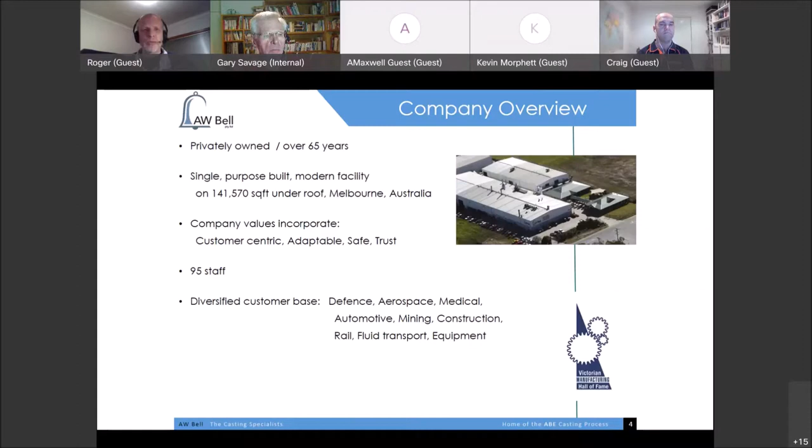So the business units for AW Bell - this is one of the things that's not as well known about the company. We often talk about our foundry activities, but AW Bell actually has 3 business units: the foundry, or main business foundry unit, AW Bell Precision, which is a precision machining facility and a separate business unit, and then AW Bell Equipment.

Now, I've told you a bit about the foundry. The precision machining is part of the company - we have 10 machining centers, which are all operating pretty much 24 hours a day, and a range of 4 and 5 axis machines. We have 3 new Okumas in that department, and it's going absolutely great guns, helping us keep up with a lot of the aerospace products we're doing.

We also have assembly, and tier 1 assembly and that sort of thing is also done through our precision machining division. Now, we also have AW Bell machinery, which is equipment design and build.

AW Bell machinery builds equipment for customers all over the world. During last year, they actually built a robotic grinding system for a foundry over in Adelaide, which was fantastic to see - it was half a dozen robots or so on the floor for quite some time, and seeing it all evolve was absolutely awesome.

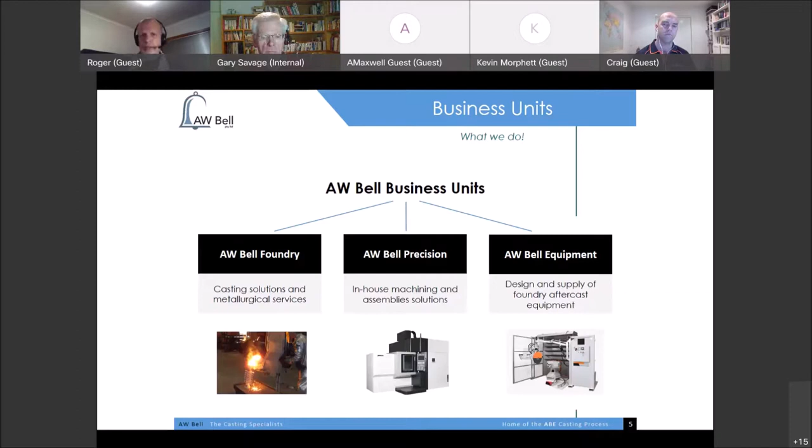But the majority of what they make is more so cut-off grinding and water blast systems, mostly for the investment casting industry. Their main customer base is in North America, where they're known as one of the top equipment suppliers in the North American foundry industry.

So some of our customers - this gives you some idea as to why we had to go down the path of upskilling and looking at what we can do to help our staff out. As our customers demand higher and higher levels out of the products, we need to be able to account for that. Certainly, Northrop Grumman is by and large our largest customer, across a range of products mostly in the EO-DAS area, but also in some other aerospace fields.

Marand Precision, which manufactures the trailer for the Joint Strike Fighter, is not far from us - a local Victorian company. BAE Systems, who we work with all over the world. Rheinmetall Defence, who we became an approved supplier for back in 2016, and now that they've moved on to get the Boxer and into Land 400, it's been a really nice outcome, and it was very good to be part of their supply chain in advance.

Australian Submarine Corporation - we supply engine components for the diesel engines that go into the Collins-class submarines. Thales, Glencore, Kenworth, Leica, Bombardier, and Levett. And Levett, of course, is where we're part of Pratt & Whitney's supply chain, where we supply engine components into the F135 engine.

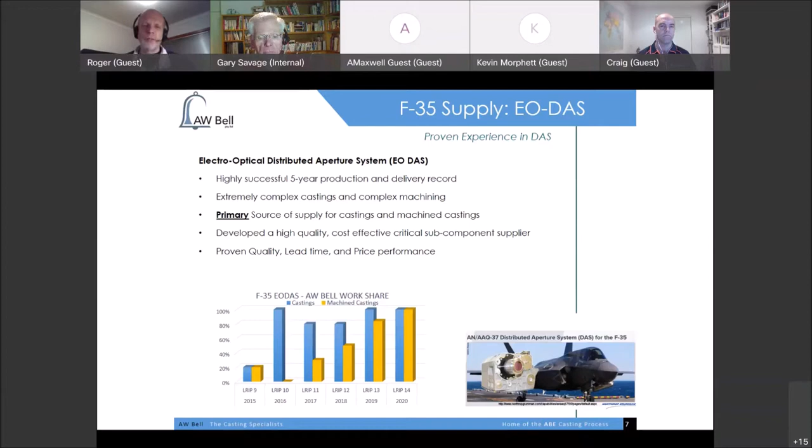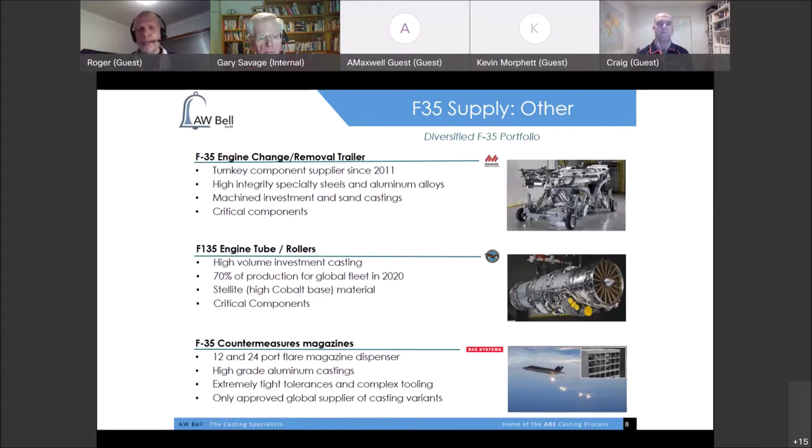Some of the other ones I mentioned - the engine change trailer has some quite significant castings, especially associated with the hubs in the corners. The parts we make for Levett, which go into the F135 engine, and then there's the flare magazines, or electronic warfare magazines, made by BAE, for which we are the only approved casting supplier of those parts globally. We're not currently in production on them, but we are the only approved casting supplier of the parts.

Other key customers include submarines, automotive.

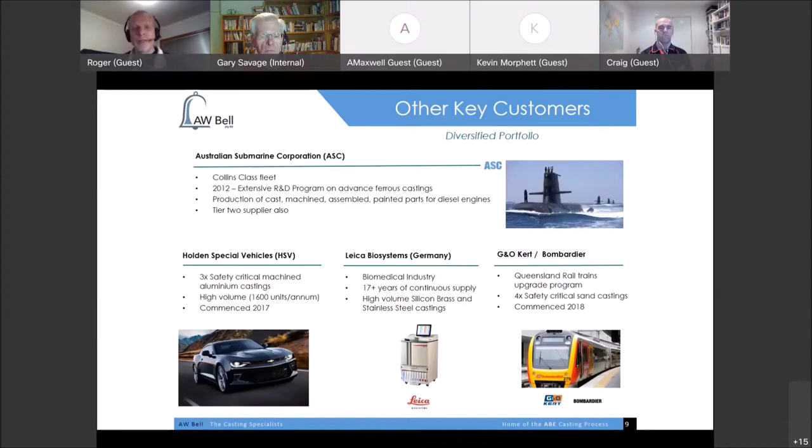We did a lot of work with Holden Special Vehicles up until recently, especially on the Camaro that you see here. Then Leica Biosystems in Germany have been a large customer for many years, and Bombardier. And we've been actually supplying quite a lot of product that has been going into Queensland Rail recently as well, which has been a really nice piece of work.

So the course in precision metal castings that was developed, it was identified that there existed a need to upskill the current staff and also to provide a fundamentally improved recruitment career pathway for workers in precision investment castings. Long term, it is AW Bell's wish to move into higher valuated casting markets requiring an improved or higher skill set.

Through the Victorian Skills Commissioner's Office, we applied for and started looking into the Workforce Training Innovation Fund projects that were being put out. I heard a little bit more about it because I sit on the Victorian Skills Commissioner's Industry Advisory Group, so I knew a little bit more about what was going on with it.

What we did is we applied for one of these as a partnership between AW Bell, Chisholm TAFE, and Meridian Sculpture. Meridian are an art foundry who also do investment castings, and they're over in Fitzroy in the city in Melbourne. The total project value for its whole run through was approximately around about 1.1 million, including cash and in-kind contributions from all of the partners.

We first had to submit a seed funding proposal, which was pretty small, around 50,000, submitted in March 2017. That was basically to give an outline to the Department of Ed and Training to say, this is what we think we're going to be able to do. What do you reckon? Then they could assess that and say yes, go through to a full proposal, or no, pull the plug then.

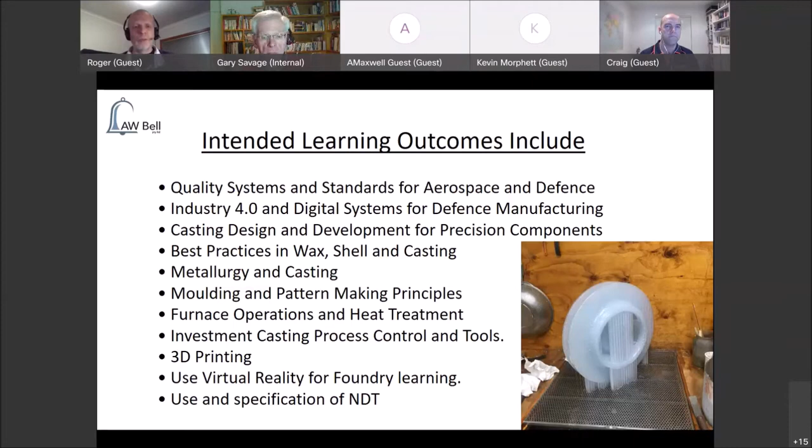The picture you see there is a 3D printed SLA impeller, which is then turned into investment casting. It incorporates a whole lot of the things when it's finally cast and made into a part, then put into a pump. It incorporates a lot of what you see on the left-hand side, except perhaps virtual reality for foundry learning, which is still a work in progress—we're all still learning exactly how you can use virtual reality for foundry.

The group is very multidisciplinary, and we chose it like this on purpose. We have a range of supervisors and floor staff chosen from all areas of the business, giving us the ability to generate multidisciplinary teams bringing different skills and experience. There's a very strong emphasis on peer learning, so you need a good mixture of people for that within the group, which is very important. I believe it's the best way to do it, and the staff absolutely love being taught how to do stuff by people they actually work with.

The course at a glance runs for approximately 2 years, so it's not lightweight—it's got a lot in it. There's a total of around 400 hours, about 300 face-to-face and around 100 self-paced. The self-paced learning is also partly workplace learning, because that can mean putting someone into a new area where they learn on the go, with the supervisor given a framework about what skills they want them to learn. Then when you go to assess them, you can do an observation and just answer the question: can they do all the things I wanted them to be able to do? So there's a very strong emphasis on workplace learning.

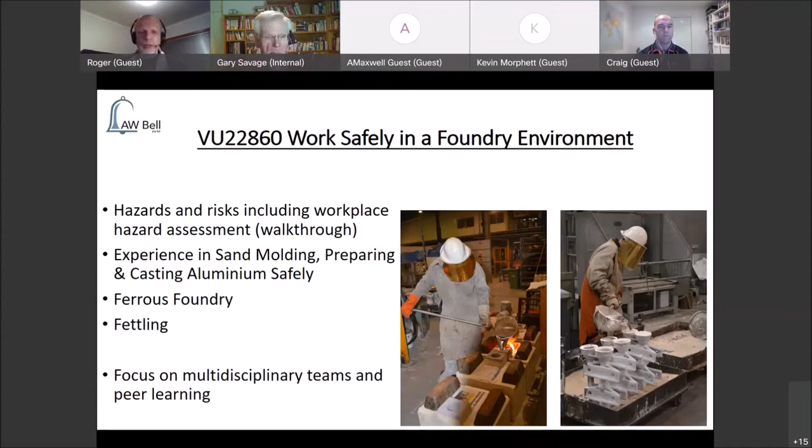I'll give you some examples of this on the next slide—these are photos I took on Friday just gone. I split the class into 2 groups: one working on the aluminium side doing sand casting and pouring aluminium, and the other half doing work in the steel foundry.

So you can see the kind of groups we've got here. The machine shop supervisor is working with two staff from the wax room, making sand molds—completely outside their normal zone, but giving them experience with the steps you go through to make a sand mold. Then one of the guys from Meridian, who usually makes art sculptures, is there with the foundry and sandline supervisor, who was instructing the guys in the area.

It's one of these things people get nervous about, and you've got to break down that nervousness and get them used to doing some of these things so they can do it well.

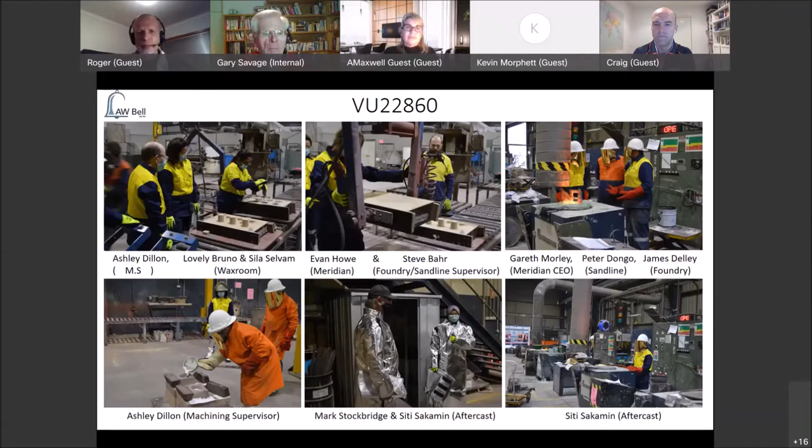The next unit we're going to be running is on performing tool assembly and disassembly. This is all about wax room injection and treeing, learning about the waxes, the machine parameters for injection, and the factors that influence quality at the wax phase.

To give an example, when we talk about observable tasks in the whole process, you're looking at things like conducting assembly of the tool, conducting injection of the runner system, assembly of the trees, and doing all the quality checks. Again, because we've got people out of the wax room, they will actually be training the other staff who aren't familiar with the wax room how to do all these activities.

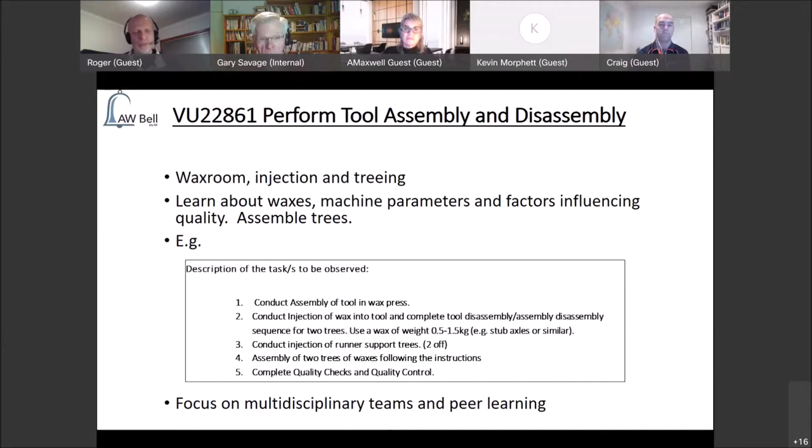These are the kinds of things we'll be looking at. You've got the wax presses down here - this one's a big automatic press you see at the end of the walkway. Then you've got a couple of parts assembled on a tree. These are going to be cast in aluminium with a down sprue and the filter section, and then the parts joined onto the tree in the middle.

Because they're going to be getting some experience in 3D printing, we'd hope they'll be able to mount some of the things they can 3D print in PLA or some other plastic onto a tree. This is probably out of scope for what the students are doing, but it's the kind of thing you can get where, for example, this is a 6-cylinder manifold that's been 3D printed and then turned into an aluminium part.

So there's a whole lot of these sorts of things you can do. There's going to be encouragement for the students, when they learn to do 3D printing, to actually learn how to take that 3D printed part in plastic and turn it into a metal part as well.

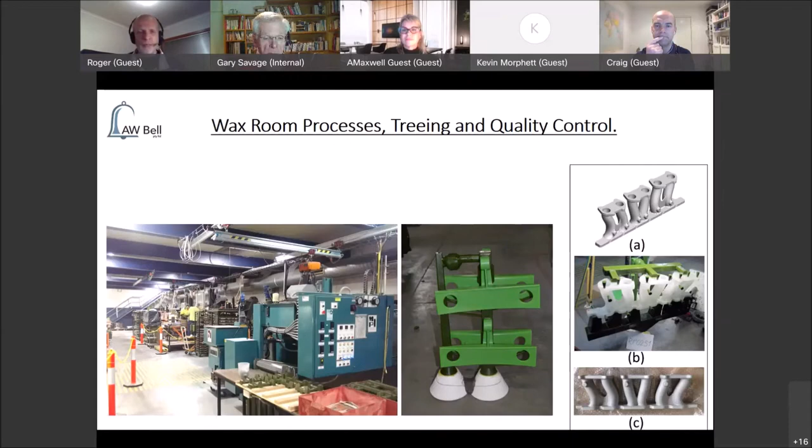The next unit is produce shells and perform dewaxing processes, and this is all about putting the slurry on the wax and building the shell. There's a lot to do here on testing the quality of the slurries and the backup coats that are put on to build the shells.

Because you're doing layers of ceramic, the incidence of what's called shell spall, which is basically a lamination defect, is one of the major issues you run into. It all comes back to the quality of all the coats, transition coats, and the stucco that you're putting on. So there's a very strong quality aspect to this particular unit.

The whole idea here is that in production, we'll get a lot fewer parts with shell spall or delamination type defects. Now, you don't always have those kinds of things, but when you do have an outbreak, they can be quite severe and give you all kinds of dramas.

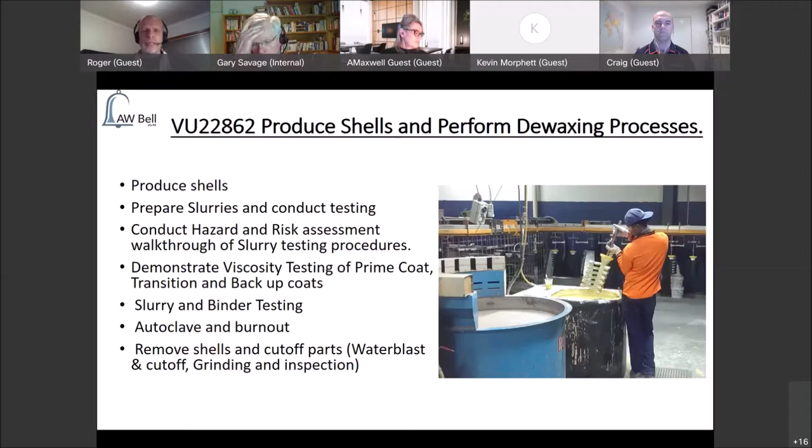So anything you can do to teach people, give people the skills and the tools that they need to be able to eliminate the problem is definitely advantageous.

Then performing casting, production and melting using metals. This is where they actually go and spend a lot more time in the foundry doing some of the things you see here: preparing and melting metal for ferrous, preparing and melting metal for aluminium, preparing melt charge calculations to specifications. That's the only piece of maths in the whole course, but it's something the guys in the foundry do every day of the week. They're always doing melt charge calculations, and if they get it wrong, you have time delays. So making sure everybody understands and knows how to do melt charge calculations is very, very critical.

Then also conducting the visual testing of manufactured castings and identifying casting related defects. What you see here is the standard casting out of a 300 kilogram furnace, pulling the shells in the second picture, pouring a sand casting in the third image, and the fourth one is a rollover furnace. That's literally just been cast there, and the operator's made a good casting.

Basically the way these work is you put the shell on top of the furnace and the whole lot flips over and pours the metal straight out of the furnace into it. You'll see the inductotherm is upside down because the furnace has been flipped when the casting's been poured. Using a rollover furnace gets people the ability to cast something without having to learn how to use the ladle, which is on a crane and takes a bit of learning. This is extremely easy to use and takes about 5 minutes for someone to learn. It gives everybody the ability to have a go at casting something that is a high temperature material.

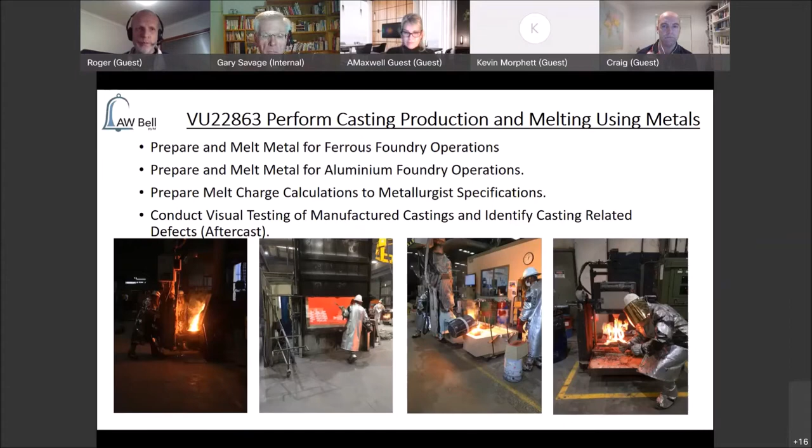Then the final unit for performing heat treatment processes, in ferrous and non-ferrous heat treatment. This is associated with understanding and preparing tempering curves for ferrous, preparing age hardening curves for aluminium, and setting up a heat treatment furnace run for aluminium, specifically to meet the requirements for aerospace. Most of this training has also been done in accordance with the SAE standard ARP 1962, and this is called out by most aerospace suppliers, who want your training program done in accordance with that standard.

There's an expectation that one day it will become a full standard that they will call out, and it's quite onerous in the hours and timing they need to put into it. But if you've got a good training plan in place in advance, that's a huge advantage. So the way that was built was keeping in mind the requirements of the SAE standard.

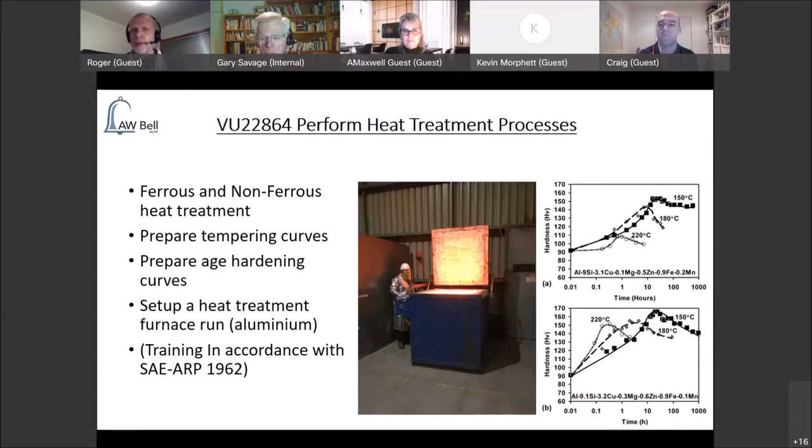So in summary, a course in precision investment casting has been established with assistance from the Department of Education and Training through the Workforce Training Innovation Fund, and supported by the Victorian Skills Commissioner's Office. In addition to the units taught by Chisholm TAFE, 5 new foundry units have been developed related to precision investment casting. The expectation is that upskilling and cross-training with staff, combined with peer learning, will work to fill skills gaps and create a more robust and integrated workforce. It's also to provide staff with a career path within the metal casting industry.

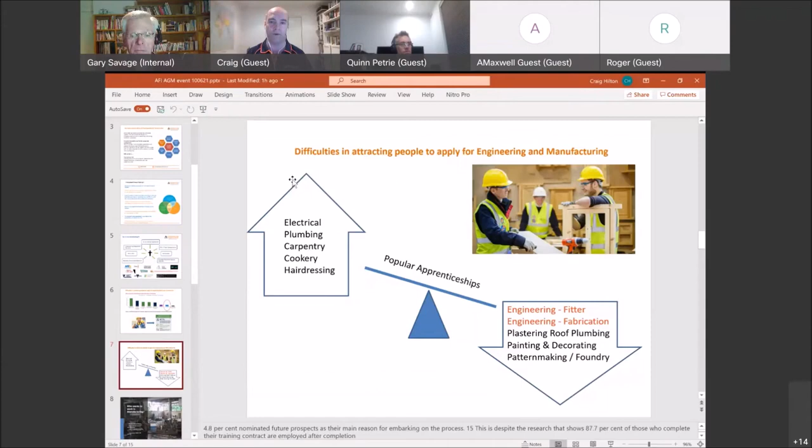I've done this before - I've asked questions in school groups and said, put your hand up who knows what a fitter and turner is, and not one hand will go up. If I said pattern making, maybe the odd hand would go up, and they'd probably think it's to do with fashion or something. So we need to break down that there are challenges in certain sectors, not all apprenticeships, and it's something we're aware of and very much focusing on ways to fix.

The audience here tonight is really in that manufacturing fold, and something we really struggle with is the image of manufacturing in Australia. I haven't gone into it too much in detail here tonight, but the stats can actually prove that manufacturing's been going great over the last few years, particularly in the last 12 months with a great resurgence. But because we've had negative images around manufacturing, because we closed some assembly lines, it's had a really damaging effect on the overall industry.

It's not to say we haven't had bad times - we've had real challenges, and there are declining numbers, and stats that back up that manufacturing has had its challenges. But I think there's a bit of an imbalance in the image in Australia about what our manufacturing sector's like. So I think we need to come together as a manufacturing sector - that includes things like cabinet making, furnishing, food production, and obviously these metal trades. We need to work together and help promote the industry and change some perceptions out there.

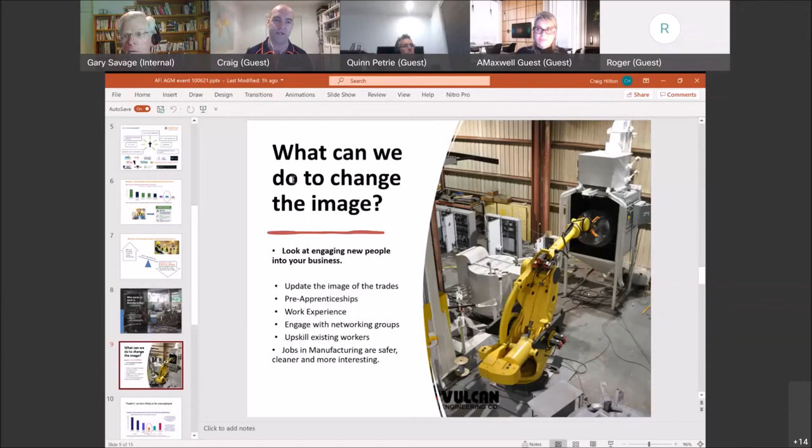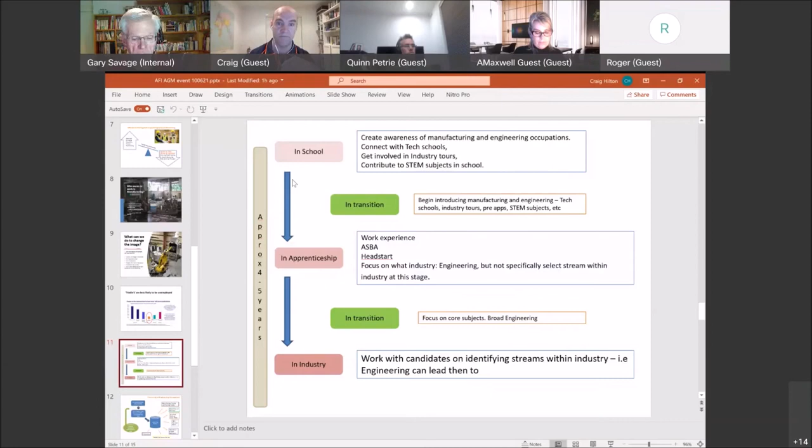So this is where I'm calling on this group to think about, when it comes to going out and promoting pattern making, casting, the foundry trades itself, doing it individually is going to be a challenge, because the fabrication and sheet metal industry is going to go out and start doing theirs, and then precision metal, CNC maintenance type stream people are going to go out and promote theirs as well. But rather than individually going out to schools working on these programs trying to highlight these opportunities to kids, I'm thinking we band together to promote engineering and the metal trades together, join forces and look at getting pre-apprenticeship programs and things all together as engineering.

Once we've got people into apprenticeships, then look at breaking an apprenticeship in half, looking at the first few years as being the core units, where they learn about all the fundamentals of engineering and metal work. And then from there, we start guiding people into specific areas. I know the old school skills are still required, and the fundamentals are sometimes different amongst those trades. But as far as attracting young people in, I don't think we can do it individually. I think we need to come together, bring people into engineering, and from there start streaming them into the sectors we need them.

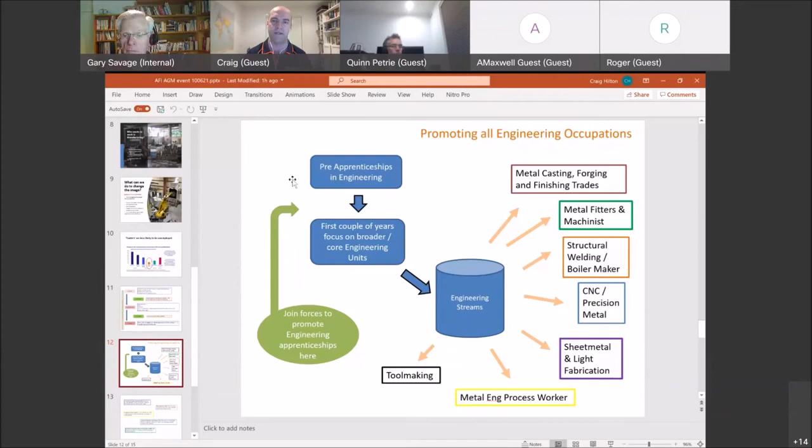Rather than trying to identify kids for two different specific areas upfront, you could bring them in for the first year or two to do an engineering apprenticeship. It's only after that that you identify the skills and strengths of those individuals and say, right, we might work on you going into the foundry area, or you can go into the precision metal area. That way we can build numbers first by bringing them in, then diversify them into the streams we need. So I'll just put that out there as food for thought.

Just the last thing there was around the different programs you can look at to start attracting young people in. I'm here to help guide you. If you don't want to do it through group training, that's fine. But if you want to connect with someone like a Local Learning and Employment Network provider that can put you in touch with local tech schools and schools in your region to bring kids in, we're happy to help facilitate that engagement as well. So I'll leave it there and open it up for any questions.